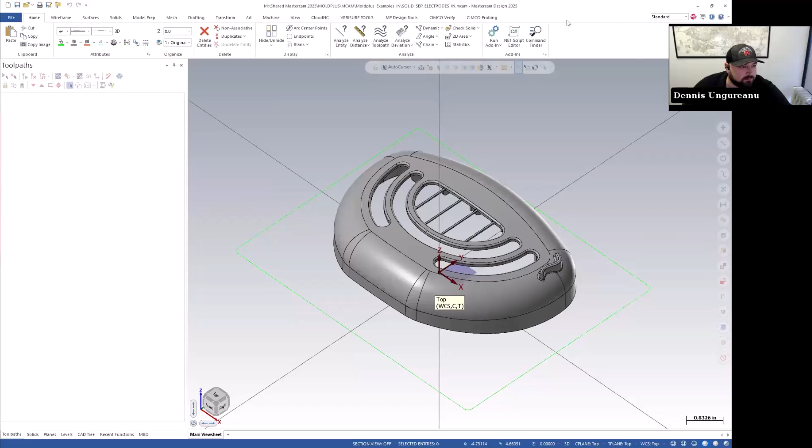I don't know if you're able to see that. Yes, I can see that. The electrode maker, that's for a sink EDM, right? Yeah, typically, for sink EDMs, so you've got to cut out the electrode shape and then be able to run it on the EDM, or what they call those plunge EDMs or sink EDMs.

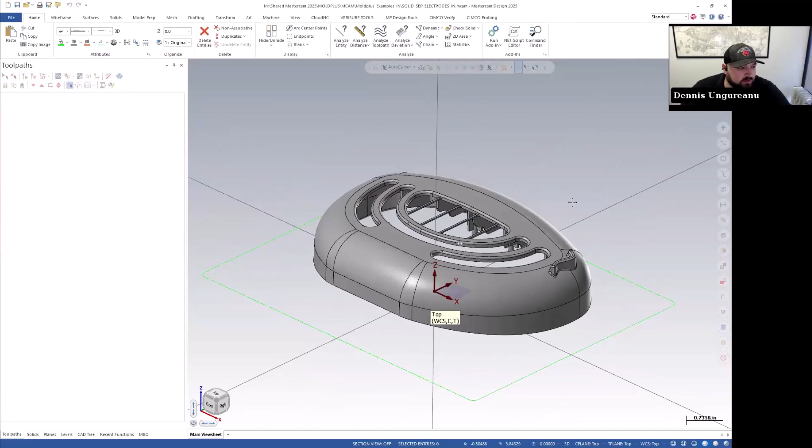So this would be a part that would need to have a mold made to it. So first we'll set up a quick mold to make on it. Notice that it works with the Mastercam levels here, and quickly create our mold separation. I click the button, I hit the green check mark, and it's done.

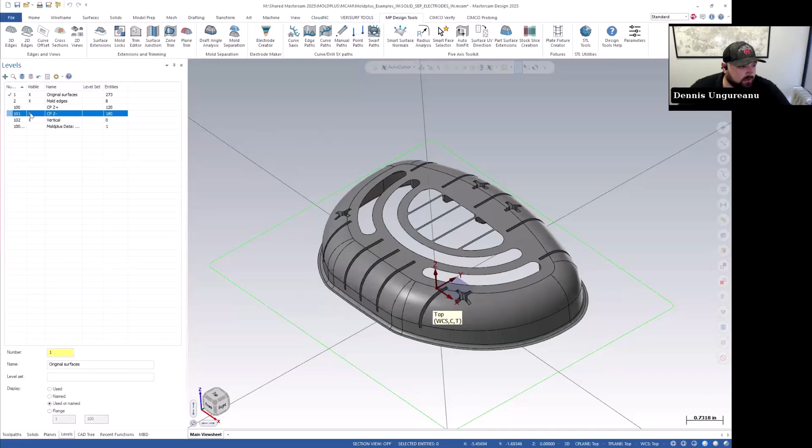So you can see how quickly it created the mold portion, the core and the cavity, and I put it on separate levels. So if I were going to create this like a sink EDM for these three slots here, this is the electrode creator tool.

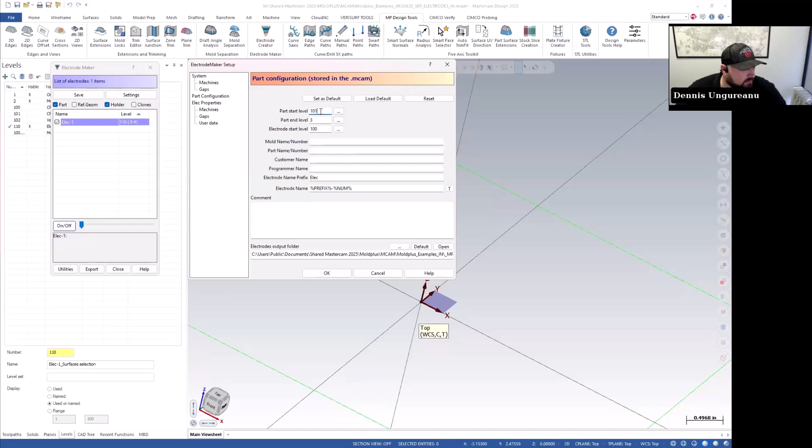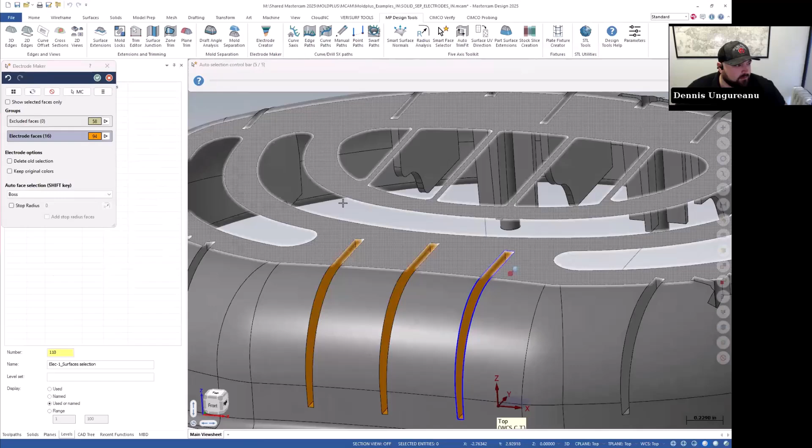And we can go ahead and create a new electrode. Okay, and then basically we can select our surfaces here, and then we can go ahead and quickly—if I hold shift, what it does is it grabs all the surfaces right there. And we can also turn on show selected faces so we can quickly verify basically what our electrode is going to look like, and hit the green check there.

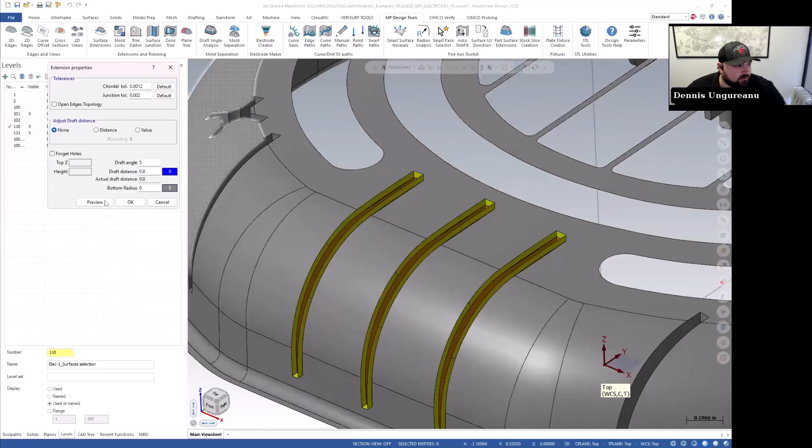Typically we'll put like a little lead on that, right? So we can go ahead and preview kind of a little extension there. Then we'll create a draft, preview that.

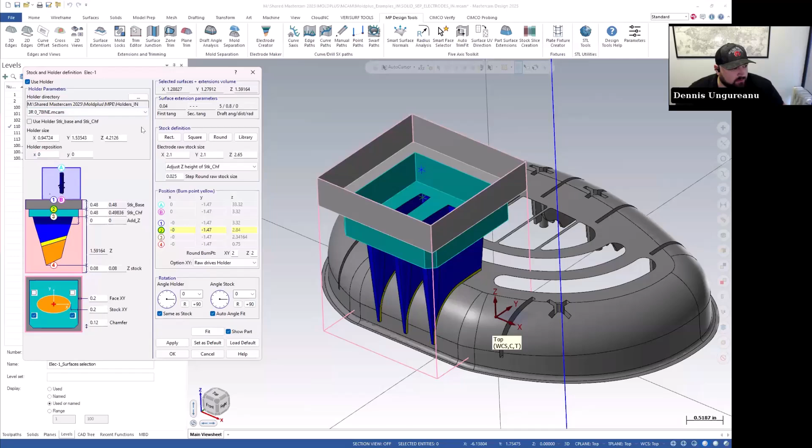And then for our raw stock, this is going to be kind of your holder, your tool holder, and your raw stock for your electrode. So you might have to set up your own tool library or tool holders depending on what you have. This one, I do have some just kind of standard 3R holders in here. So go ahead and hit OK on that, and you can see how quickly I was able to build that out.

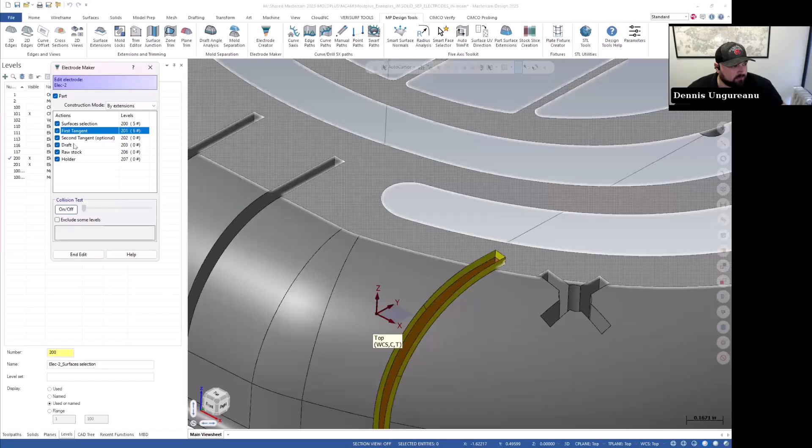And if I wanted to do another one real quick, you just kind of keep going at it. Hit this guy here, and the same thing—preview, draft, preview, raw stock, pick your holder.

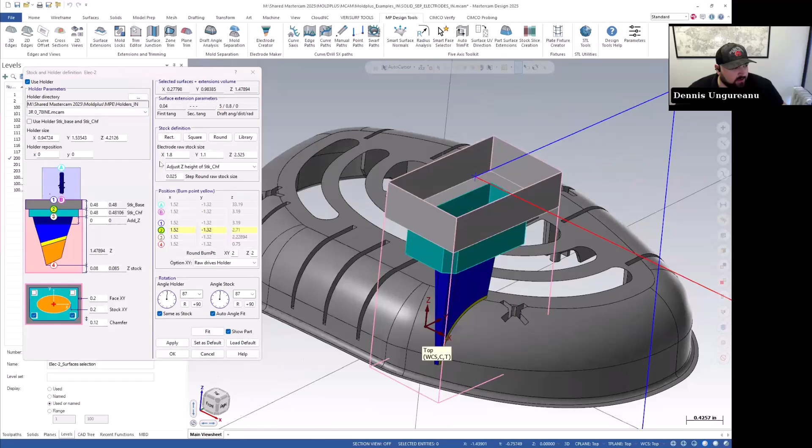And if you need to change some of the sizes, it tries to fit the size of your material exactly with what you have, or what needs to be defined basically based on the shape. But you can go ahead and change all that information for your raw stock size and then hit OK. And there you go, awesome.

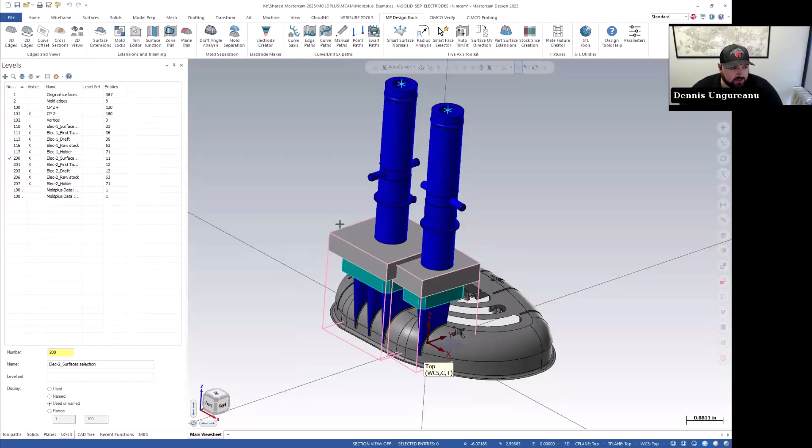So pretty quick, and just kind of keep at it. This works off of the surfaces here directly. You can also do the same thing off of a solid model or a full solid body. So the electrode maker is just super easy to work with, and also just being able to create the mold separation by literally two clicks—I think that's the coolest thing ever.